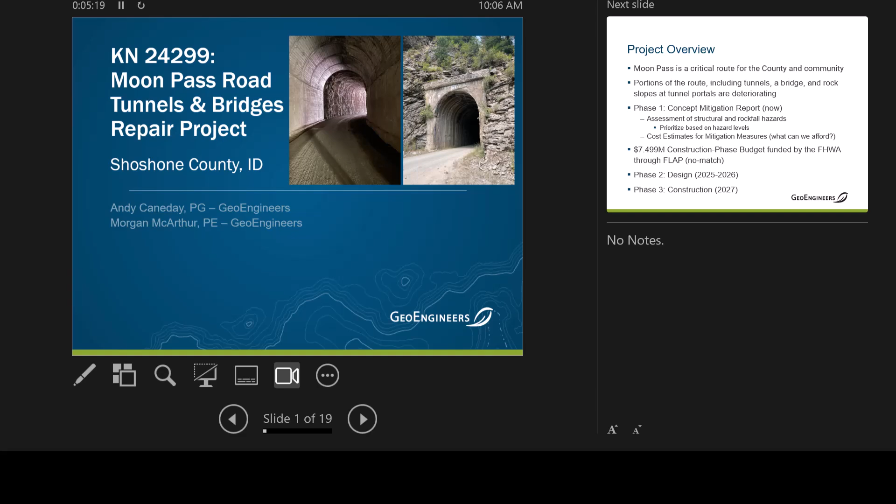So we'll start off with project overview. Hopefully everybody knows where Moon Pass is. It's a critical route for the county and the community. It's got a lot of users, recreational users and non-recreational users. It's an emergency route from Wallace here over to Avery. But then we've also got folks accessing the Hiawatha Trail system. We've got hunters using it recreationally, and others. So it's an important route.

Portions of the route, including all of the tunnels, the bridge, 20404 is the key number for the bridge, and then the slopes at the tunnel portals are all experiencing varying levels of deterioration. And Jim alluded to that. It's been a problem for a while, and there've been some emergencies over the years. So there's just varying levels of disrepair and damage.

So where we're at right now in the project is phase 1. That's kind of the concept mitigation report that we put together. And really what we did as part of that is assessing the structural and rockfall related hazards, prioritizing some of those hazards based on the level of risk associated with the hazards, putting together cost estimates for mitigation measures, basically what can we afford within the budget that we've got.

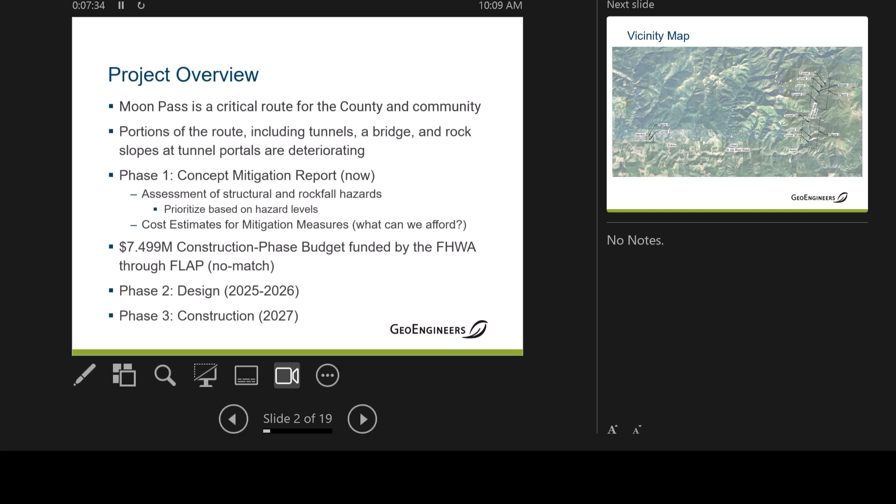So here's a vicinity map. It's a little bit hard to see on the TVs there, but let's see if I can get a little pointer here. Where's the pointer? Okay. So this is where Moon Pass comes down. Wallace is up off the screen this way. Ties into the Hiawatha Trail system right here. Here's tunnels start at 30 on the north end and down to 36 as you approach Avery. And then there's another tunnel, 37, here further down the system, down the St. Joe with that.

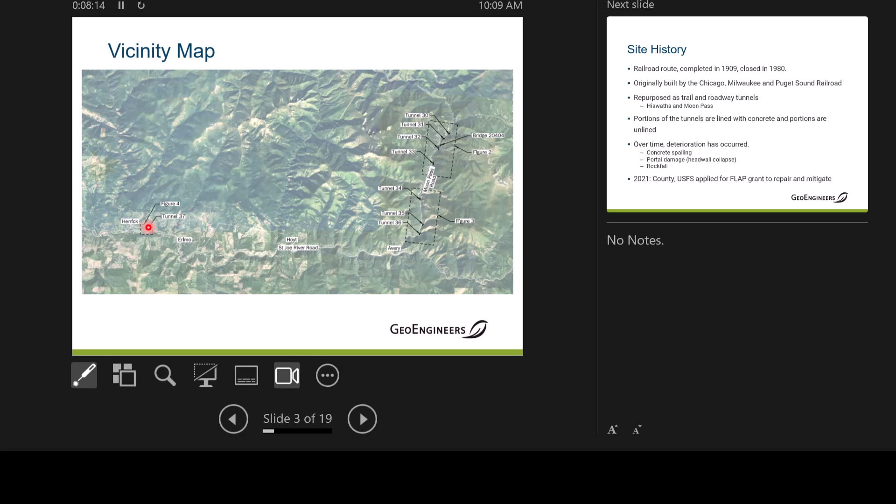So a little bit about site history, and you're probably already familiar with this, so I'll hit it at a high level. But it is a historic railroad route. All of the construction was completed in 1909. It was used for a long time, but closed. The final train cars passed in 1980. It was originally built by Chicago, Milwaukee, and Puget Sound Railroad, and you can still see the stamps on some of the tunnel portals that say CMMPS on there, and that's what that is related to.

After closure, the route was repurposed as a trail system and road. So that's the Hiawatha Trail and then the Moon Pass portion. And then some of the tunnels are kind of a mixed bag of lined and unlined portions.

Theoretically, the portions that are lined were lined because it needed to be lined during the construction process. They had weaker rock conditions, right? And so as they're tunneling through here, they're realizing, oh, it's starting to collapse or whatever. We need to put in a liner system. So those portions of it are lined with a concrete liner, and then there are unlined portions as well.

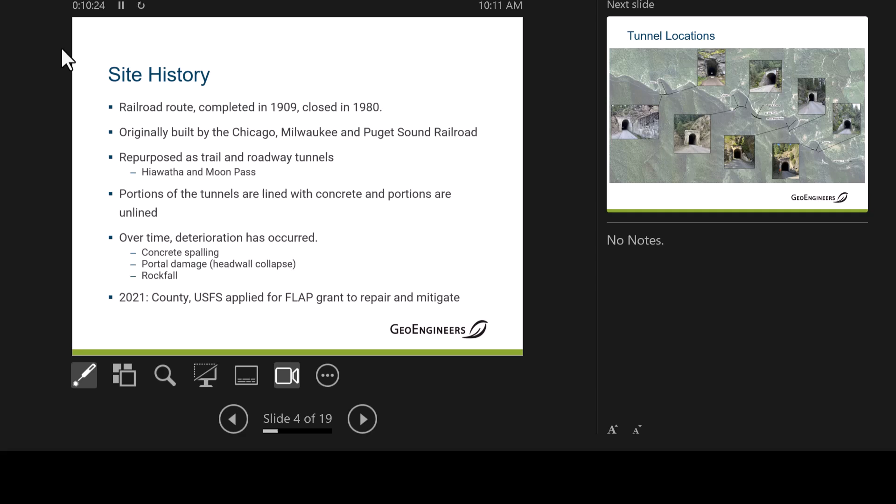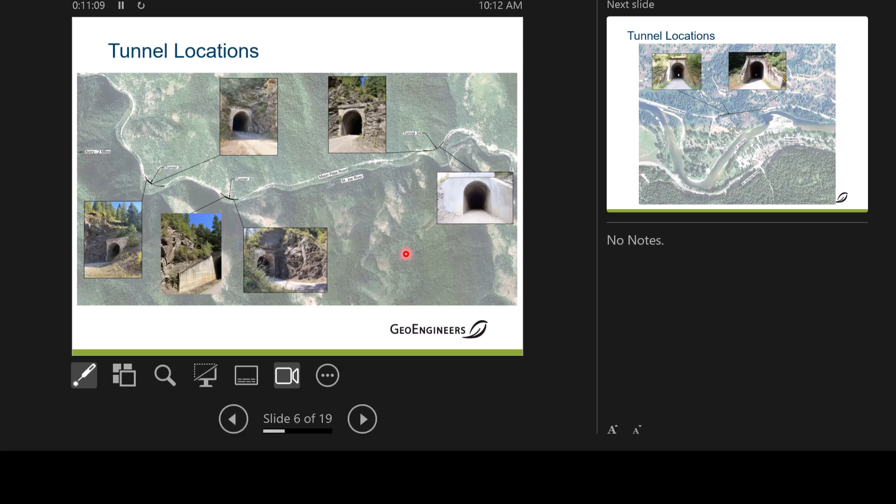Real quick, just photos of each of the tunnel portals, starting at the north end on the lower right there, Tunnel 30, and working our way further south, closer to Avery. Don't need to go into too much detail here, just orienting you to which tunnels are which, because we will talk a lot about different repairs in different tunnels, and it's just a reference point for orientation. And here you can see the rebuilt tunnel portal at Tunnel 34 that Jim mentioned. And then there's Tunnel 37 further down the line.

So we'll talk a little bit about the evaluation and prioritization process. We started off by assessing existing conditions and historic performance. That is, we've gone out and done reconnaissance evaluations of the insides of the tunnels, the portals, and the slopes approaching. Also recognizing a lot has been done historically, we reviewed some of the historic work, historic assessments, and inspection reports by ITD, both for the tunnels and the bridge.

And then we did an initial reconnaissance, but also a more thorough inspection of each one of the assets, really identifying what the hazards are and what the risk level associated with those hazards is, boxing it into high, moderate, and low risk. And that's really risk to the public for the most part. And hopefully you can probably read that.

So we put in the hazard level matrix here that we were going with, really focusing on the frequency of potential failure, how often this might happen, right? What is the likelihood of it impacting the roadway and users of the route if they were in harm's way at the time of that impact? So that's how we broke out high, moderate, and low priority.

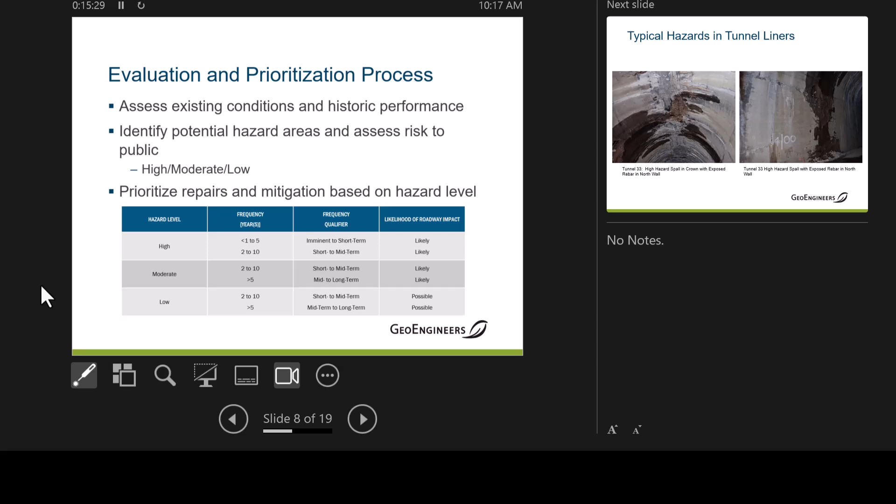I'm going to hand it over to Andy to take over and start talking about some of what we saw out there. Yeah. You want to share? I'll just let you drive. Okay. It's probably easier. Okay.

Just a few slides coming up, really just to give you a really quick sample of some of the deterioration we saw out there, followed by some of the mitigation options we have suggested as ways to move forward. So what you're seeing here are a couple areas within Tunnel 33. This is 33, thanks. This is what we call a high hazard on the left. You can barely see the rebar being exposed in that spall area.

A lot of seepage. The reason you see spall in these areas of seepage is because the seepage comes down. In the winter it freezes. It mechanically breaks up the concrete, and then in the spring that falls. It could fall as gravel, a couple pieces of concrete coming down. It can also fall as a fairly substantial chunk. The reason we consider this particularly to be a high hazard is because it's in the crown, which means it has the ability to fall directly onto a car.

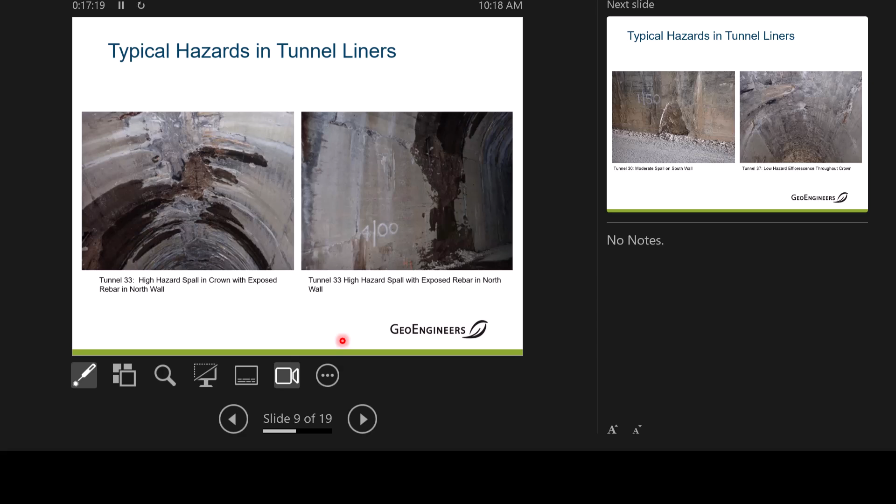Next slide. Here's another example, Tunnel 30, a moderate level spall on the south wall. Again, that doesn't create a huge hazard for the traveling public. It's something that over time is going to get worse. If it can be fixed with the funding, then great. If not, it's not a huge hazard.

Tunnel 37, this is an example of efflorescence, which is basically leaching of the concrete onto the liner. It can denote where you have seepage, and it often is associated with relatively minor cracking. This is a low hazard, at least at this point. It's an area that we would keep track of long term to ensure things aren't getting worse, but not a significant hazard at the moment.

Just one thing to add here. This is what I was talking about and what Jim was alluding to, where, if we aren't able to fund the repair of spalls on the walls of the tunnels, like that one on Tunnel 30, people might see that and be like, oh, well, you spent all this money repairing the roof. Why didn't you fix this while you're at it, right? And hopefully this helps provide the story behind that. Same thing with Tunnel 37.

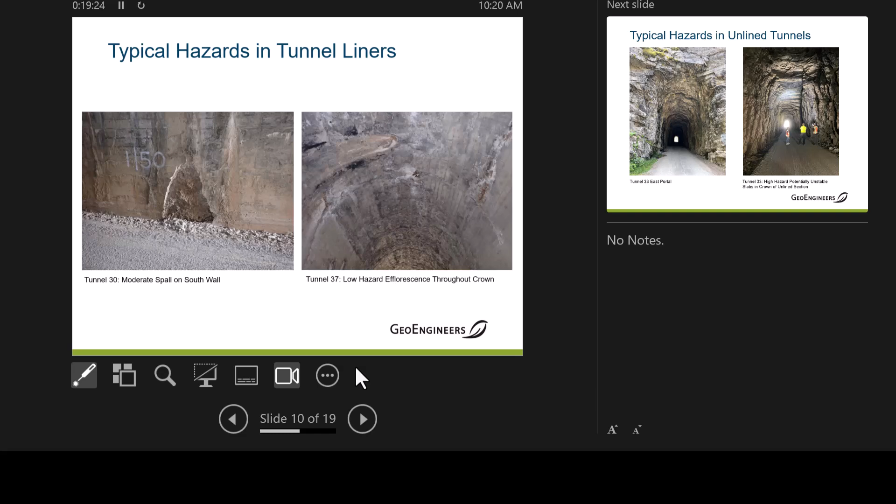In the winter, you've got these big icicles because it has a bunch of seepage ports in the crown. And it's visible to local residents because there's houses nearby, and that's probably the most accessible tunnel in the winter. So people might be like, oh, you guys fixed all these other tunnels, why aren't you fixing this icicle problem? Well, it might look bad, but it's not really a hazard to the public, right?

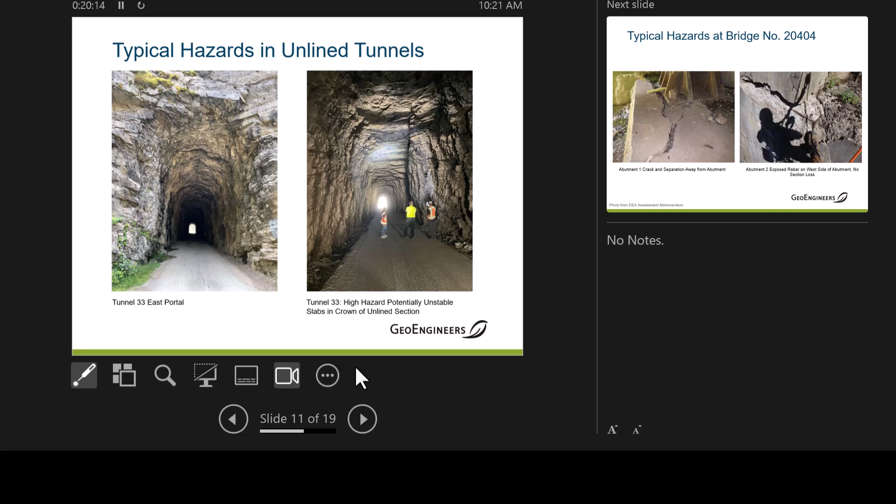Yeah, so some examples of the unlined sections. This is Tunnel 33. I won't get into a ton of detail, but you can see some of the fractures in the rock and how they form. We consider this area to be a relatively high hazard because those slabs in the ceiling have the potential to fall down on the cars. It's one of those low probability but high consequence type of events. So this is an area where, as I'll get into in the mitigation, we want to do something about this potential rockfall hazard to keep the public safe.

And then just an example of the deterioration we saw on the bridge. On the left, we have abutment 1. There's a very noticeable crack, and that crack actually extends into the footing, which is a big concern for us because that is the loading area of the footing. So this is an area that we definitely want to fix.

On abutment 2, we have some deterioration. However, that is not currently a loaded portion of the footing, so we're not as concerned. That would be a moderate hazard. So that's, again, the difference between areas we're fixing and areas where we're recommending not to pursue that.

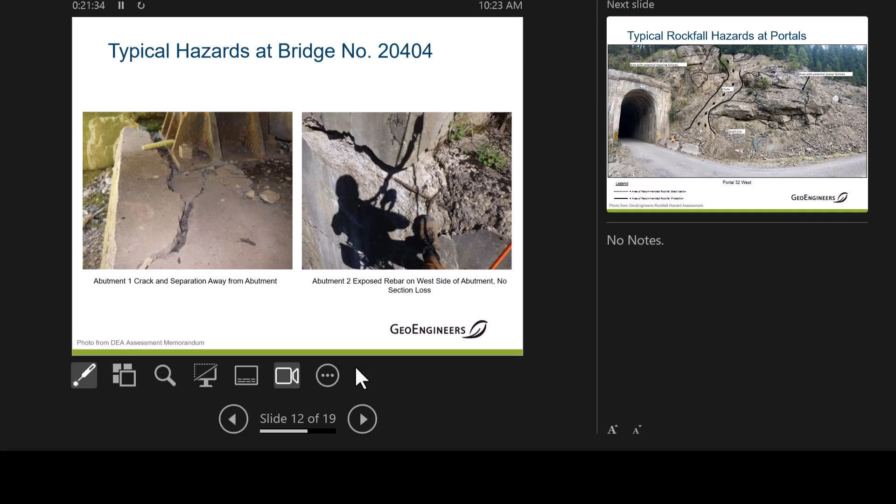And that one on the left, that's a pretty serious issue, and one of the few things benefiting here, the reason it hasn't needed to be addressed yet, is because that was designed for railroad loading, right? So it's a lot heavier loading. So it just had a little more forgiveness in damage to the abutment before it really needed to be addressed. But at this point, it's getting pretty critical.

And then here's just an example of some of the typical rockfall hazards we see at the portals. We didn't really talk about this, but there was an initial assessment done on these tunnels by Shannon & Wilson back in 2021, 2022. One of the things they didn't address were the portals, and FHWA came back and said, look, we actually have some pretty serious problems that we would like to try to address with this funding as well. So we took a really close look at the actual rock slopes adjacent to the portals.

Again, won't go into a ton of detail, but you can kind of get an idea with the chute. It just sends rock right down. Also not a great place to sit. But we wanted to take a close look at the size of the rocks at that particular location. This is a relatively manageable situation with the chute. You can put up above some barriers, but there are also some pretty significant blocks that we've tried to outline that are potentially unstable. And those are something that we would highly recommend stabilizing, and we have recommended to do that.

Because in some cases at these portals there are areas where you can catch this rock and it'll sit in the ditch and it's not a huge issue, mostly long-term maintenance. But if one of these larger blocks came down, you could potentially block the road. You could do some significant damage to a car. We're not going to solve all the problems at these portals, but we do want to try to reduce the risk as much as we can with the available funding.

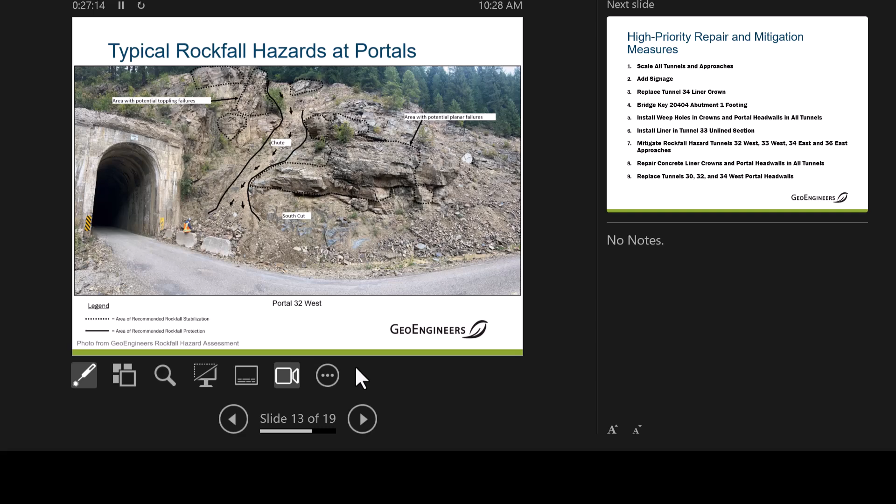All right, so this is just a quick summary of where we think the higher priority repair mitigation measures are, where we should direct our priority for the high areas. So the scale all tunnels and approaches, that was the first thing I talked about at that one portal. We would do that at all the portals and throughout all the tunnels. And what that would do is, again, at the portals, bring down all that loose rock.

In the tunnels, they would take crowbars and pry off the loose concrete. In the unlined sections, all the loose rock in there, they take that all down. And that is probably the most cost-effective way to reduce your hazard. Now, it's a short-term hazard reduction, though, right? Because those processes are still at work.

The seepage coming through, the freeze-thaw action on that rock, within 5 years you might be back to about where you were before. So it's a really good way to, in the short term, reduce that hazard. But then the second is to add signage.

This is just to notify the public if you're entering an area where we have rockfall, be on the lookout, drive a little slower. If there's rocks in the road, slow down. You don't want to damage your car. And just be on the lookout. This is also a really good way for the county to protect themselves. You've warned the public that this is an area we need to be concerned about.

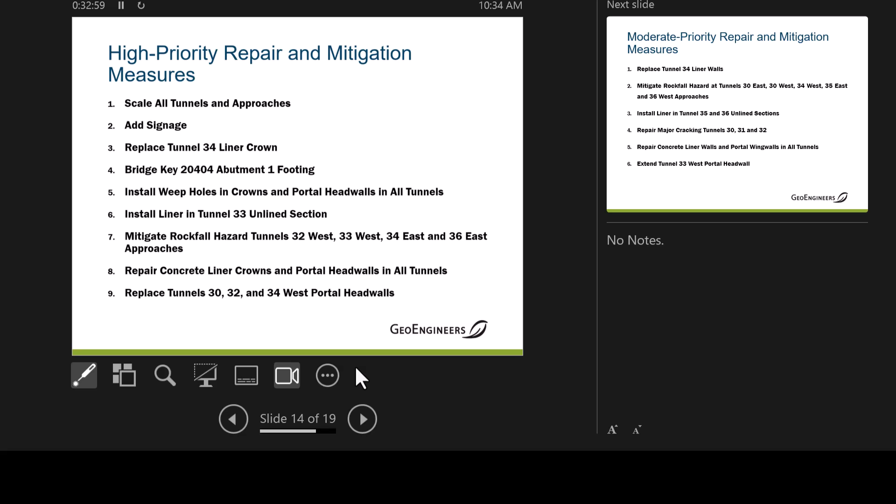And then the last high priority item was to replace the head walls, similar to what we did at 34 East. We'd want to do the same similar idea in tunnels 30, 32, and 34 West. So that would involve taking the old one out. Yes, rebuilding it.

These are sort of the moderate priority repair areas that we identified. Tunnel 34 liner walls, again, that was the full replacement that we'd like to include in this project, just because we're already doing the crown. And then number 2 would be some additional rockfall mitigation at some of the approaches. 3 would be to install liners in the other 2 unlined tunnels. That would be 35 and 36, similar to what we would do at tunnel 33.

And then another thing we found in some of the tunnels was some pretty significant cracking. Again, we don't think that's a major or a high hazard because it's cracking. It's not actively spalling down. It's typically in the sidewalls. But given additional funds, we could potentially mitigate that.

And then 5 is to do that patching on liner walls. Again, moderate hazard, doesn't have the direct ability to fall on the cars, but if additional funding allows, we would like to stop that deterioration in the tunnels.

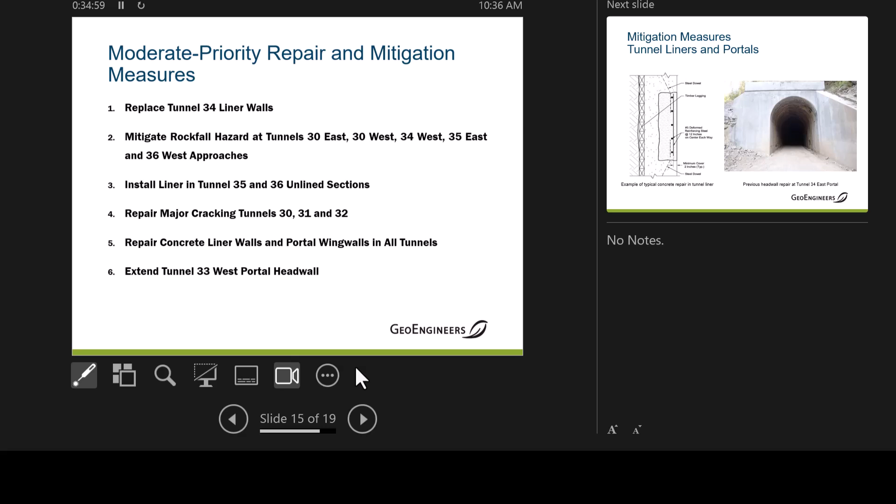Really quickly, I'll just kind of go through some potential mitigation options. On the left, this is just a real typical section view of a concrete repair. They'll saw cut out the deteriorated concrete, reinstall rebar reinforcement, and then place a new concrete patch over it. So that was what you would see in the crown for the concrete repair or the sidewalls.

This is just an example again of the Tunnel 34 head wall replacement. Something I wanted to note here is that this was an emergency repair. In the case of this project, it's not an emergency project, so it does need to go through SHPO, which is the State Historic Preservation Office. They have already expressed some concerns that the concrete work needs to match the historic appearance of the original work.

Like shabby and falling down? Kind of. It looked pretty good.

I know. So we don't know exactly what that's going to entail. It could literally be something as simple as just having the wood imprint in the concrete to make it look like how they used to do it. It could mean a lot of things, but we'll continue to work with SHPO once we get into final design and work out those kinks. But it's one of those things where we have to keep them happy.

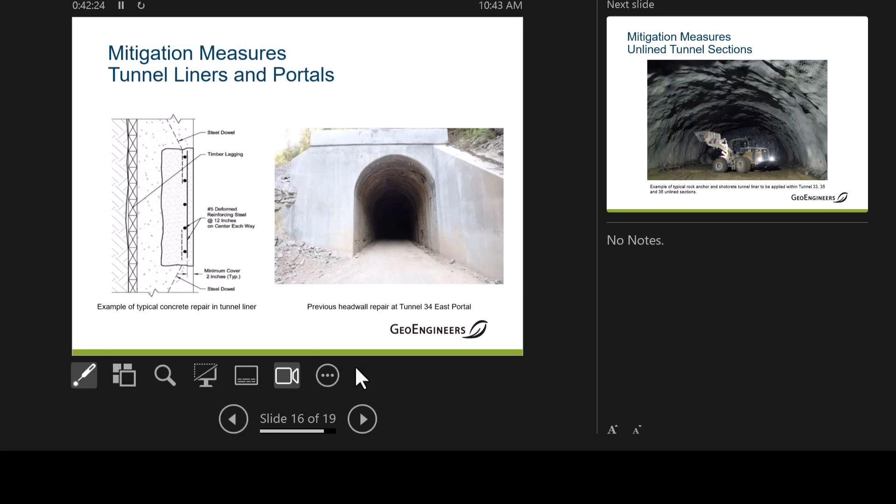Maybe a simpler or less intrusive solution is to basically place a new liner inside the existing liner. And that's something that we wanted to try to avoid because we know these are already narrow tunnels, single lane. We don't want to take away any more space. It's not like we've got big trucks going through there or anything, but we'd like to maintain the width and the size of the tunnels as they currently are. Yep. Yeah, let's go on to the next.

So here's an example of what it might look like if we did a shotcrete solution in the unlined sections of the tunnel. The other alternative would be to do a mesh, and it allows you to see a bit of the rock. There are some trade-offs. The shotcrete solution is a little bit more robust. There's more corrosion concerns with the mesh. Eventually, that system, it's probably 50-year life on it. It's high tensile galvanized mesh, but eventually it's going to corrode, and you'll have to do some maintenance.

Whereas a shotcrete solution's a little bit more robust and long term. You might potentially have some areas of seepage come through and spall, but typically, if you do it right, it's a very, very long-term solution. So we'll work with SHPO on that, and just let them know the positives and the negatives of each potential solution.

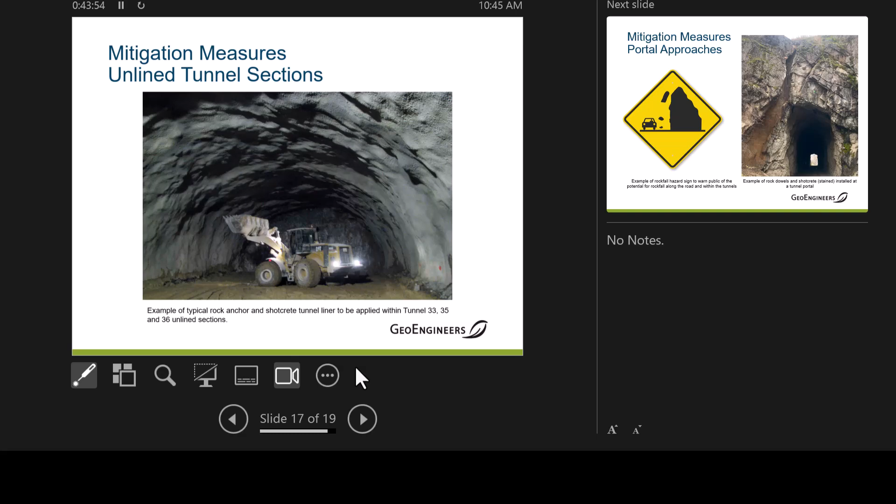But you could just tell people to keep their lights off in the tunnel. If only it were that easy. Hopefully a good solution. Exactly. Oh, did you want to back that up? Sorry. No, it's fine. Okay.

Again, just really brief. Here's a typical sign you might see to warn folks. On the right, you can barely see them. Those are little plates and bolts. You talking about in here? Right there. You see it? Oh, yeah, there they are. We usually put a little quick stain on them. They're all still galvanized, but with this Natina stain, you barely see them. So from an aesthetic standpoint, that's worth the cost because you're never going to see them.

That little gap there as well, that's actually stained shotcrete. That was a shear zone that was working its way back and undermining the blocks that we bolted. So we just put some weep holes and some bolts and sprayed shotcrete, and then they came in with a really quick spray. Done. You can't even see it. It looks really nice. So those are really easy ways to make the SHPO happy, the Forest Service happy, and the tourists are just never going to see it.

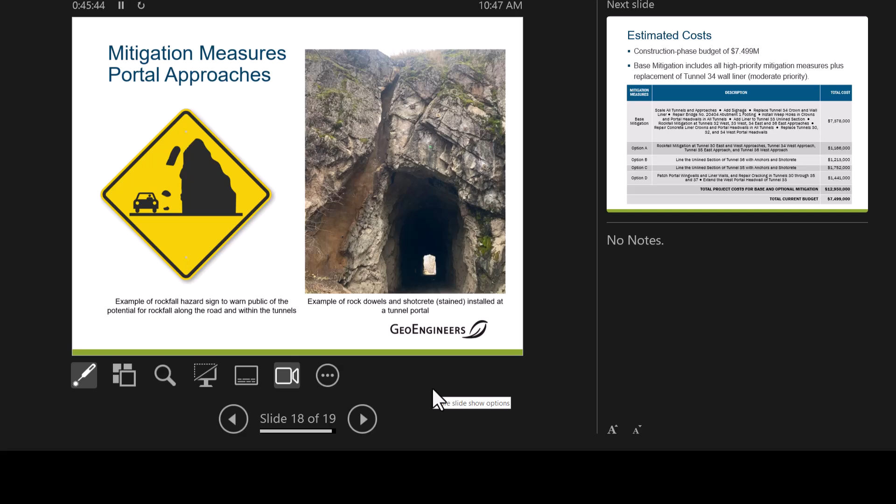There are some more intrusive mitigation measures like the cable nets and stuff. Again, we can get those colorized, so it's harder to see. But yeah, just some quick examples of things we can do to make things look a little bit more aesthetically pleasing while doing the job. All right, I think it's you now.

Yeah. So moving on to the estimated costs for the repairs here. I mentioned before we've got a construction phase budget that's just about $7.5 million. When we talked about the high and moderate priority repairs, those were in order of priority. That's why they had numbers next to them. So based on the estimates that we've put together, we think that we can do all of the high priority repairs and also repair number one of the moderate priority repairs, which is the wall sections of Tunnel 34, within the planned budget.

So that's what our base mitigation option here includes. Everything that Andy talked about in the high priority plus the walls for Tunnel 34. And as you can see, our budget there is about $7.4 million. But we also recognize that sometimes costs can come in higher or lower than anticipated. In the case that they came in higher, which we really hope isn't the case, we'd have to start shaving off some of the lower priority items in our prioritization order.

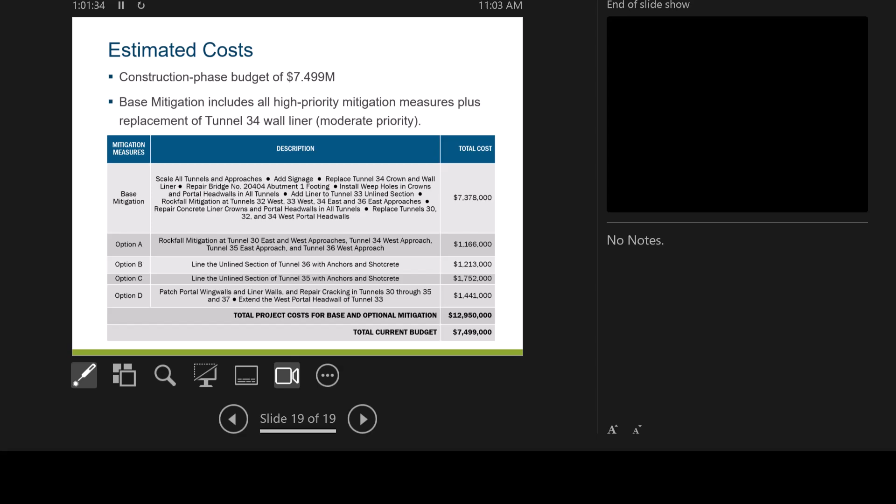Okay. Any more questions, Commissioner? No. Well, thank you for the detail. That was one of the better briefings that we get. Good. Awesome. Free money is nice. It's the best kind. Right when I hear that there's no cost to the county, it changes your whole attitude in looking at it, right? That's why I wanted to say it at the very beginning, because it's free to you. So that's the best kind.

Thanks. And Stephanie. That's not an aside. It's Jessica and Stephanie. All right. Well, thank you very much. Thank you both for your time.